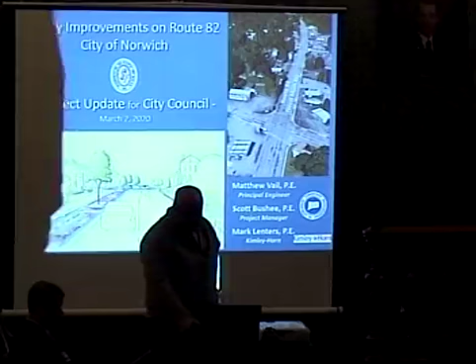Last time we were here is about 2 years ago, so looking to give you guys an update on what's been happening in the last 2 years and status of the project and just a little more information. Getting things rolling. Why we're here. Just a short video, give you a quick indication of what we're looking at from DOT as far as operation and safety problems that bring our attention to this corridor. So this is the driveway in front of ShopRite. If you notice, there was a lot of time, there was no traffic moving.

Now you have someone here that wants to make a left turn into the driveway. Some of these cars behind them, they're trapped. They're through vehicles and they're stuck behind someone who wants to make a left turn. At this point, the capacity on the corridor is really failing. All these vehicles are trying to now change into another lane. That lends itself to sideswipe type crashes. There's one car wanting to make a left, has got traffic backed up as far as you can see. And the guy just ran the red light at the end of it.

How's this? Okay. With the roundabout corridor, you won't have those problems. Again, we've got a time when nobody's moving. Traffic's kind of stopped. You don't have dead time with roundabout corridors. Somebody's moving all the time. Again, we have a vehicle, got their left turn signal on. Through vehicles behind them, they're trapped, they can't go. Sometimes people tend to change lanes, sideswipe crashes can occur. Now traffic's backing up all the way past the crest of the hill as long as you can see, just because that one vehicle wanted to make a left turn. With roundabouts, all the turns are right turns. You don't have any left turning vehicles, you're not crossing lanes to get in and out of driveways.

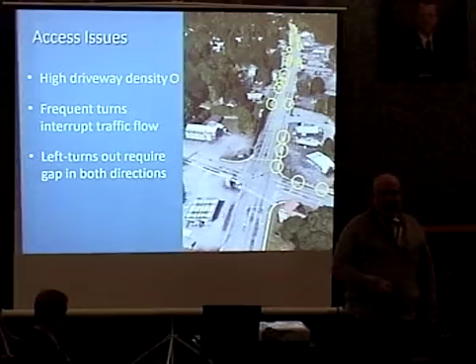You don't have that with a roundabout. All the turns will be right into the driveways with the raised median, and all the turns at the intersection are right turns with the roundabout.

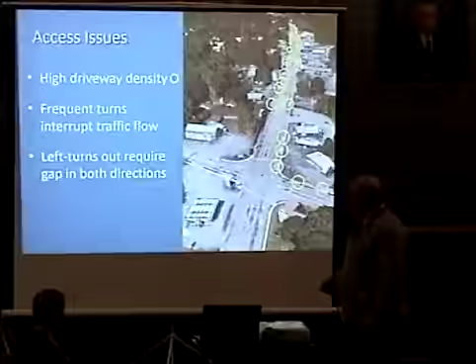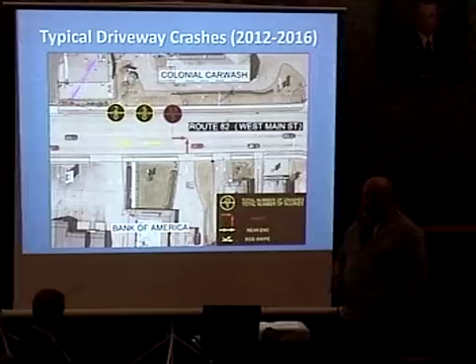This is a typical driveway along the corridor. This happens to be Bank of America, but it could be any driveway along the corridor, a commercial business. 5-year period, we've got 19 crashes with 5 injuries, all related to people making a left turn out of the driveway. And that's not even looking at driveways where you could make a turn in and out at the same driveway. This is just an exit-only driveway, so it's pretty significant.

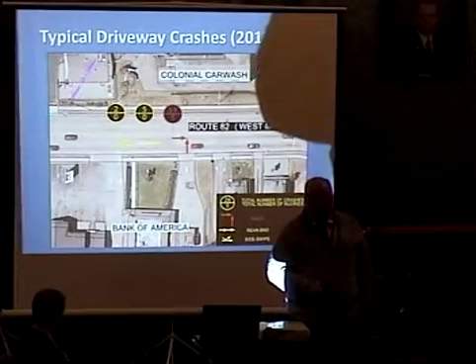Looking at one of the major intersections on the corridor, this is Route 82 at New London Turnpike, crash study. We've got 66 crashes in a 5-year period. That's pretty significant.

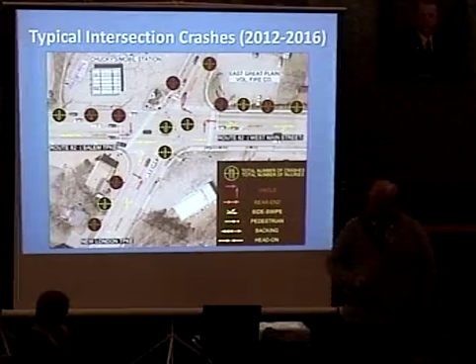Looking at the crash patterns that we have, we've got 17 rear-end crashes going eastbound, 11 rear-end crashes going westbound, 8 rear-end crashes going northbound, 9 rear-end crashes going southbound, and a number of angle crashes within the middle of the intersection. So with a roundabout, these types of crashes, they're not eliminated, but they're much, much less intense, much, much less in number.

One of the previous concepts to fix this corridor, address safety, was to add a 2-way left turn lane. Years ago, that was the only tool we had in our toolbox. New England wasn't really in the business of roundabouts. That came about later. But at that time, we had thought, well, maybe that's a viable solution. It was $34 million to put in the 2-way left turn lane. And that would get vehicles out of the through lane and into a safe haven if they want to turn into one of the driveways.

But with that, if you're at a driveway and you want to make a left turn, now you've got to cross 2 lanes of traffic going one way, across the 2-way left turn lane, and then have a gap of traffic in the other direction to execute your turn. So that's even more lanes you have to cross than what you currently have, which are already causing problems. So we know that's not a real good safety solution for the corridor.

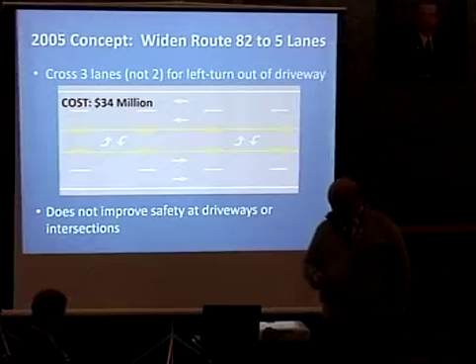What's really needed is access management. And in the planning toolbox, transportation safety toolbox, access management is kind of a word that we use when we're looking at things like raised medians, driveway consolidation, things like that. Route 82 really needs a raised median, and that will prevent left turns in and out of the driveways and make all the turns happen at the traffic signals.

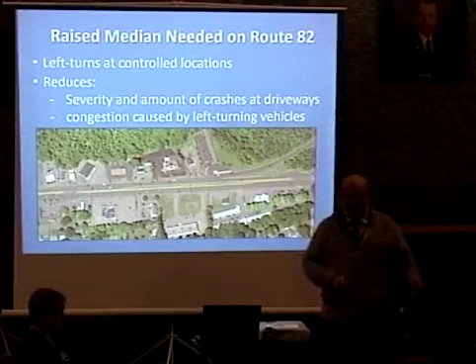Turns in and out of the driveway with a raised median will be right in, right out. You're only looking for a gap in traffic in one direction. You're not crossing a number of lanes to execute your turn. Much easier, much safer.

And this U-turn capability would only work for a passenger car. Your corridor is very commercialized. There's a lot of delivery vehicles, whether it's a box truck or a tractor trailer or something in that neighborhood, it wouldn't be able to make that U-turn. In order to make that U-turn for the larger vehicles, you'd have to do something like a jug handle, come around, like you see a lot of those in Massachusetts. And it's really not a viable option for that corridor. It's too much property impact, and it's really not going to address safety.

So what's really needed are roundabouts at the existing signalized intersections at the end of your raised medians, and the roundabouts will address the U-turns needed at the intersections to allow traffic to go past the driveway they're interested in, make a U-turn at the roundabout, and go back and execute a right turn into the driveway.

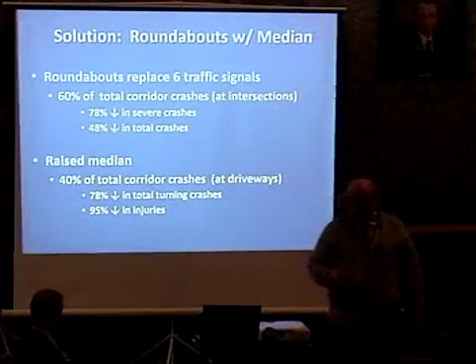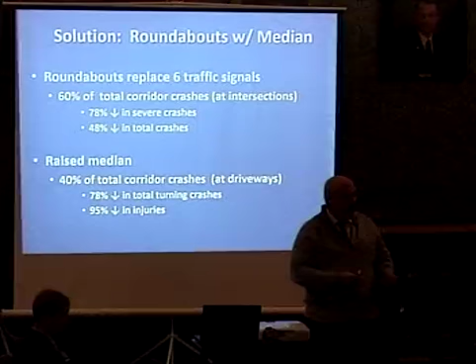With the raised median, 40% of the crashes were occurring at commercial driveways and unsignalized intersections. Studies have shown where corridors have had a raised median installed, it's reduced turning crashes by 78% and reduced injuries by 95%. The injury reduction makes sense - that's where you don't have a vehicle crossing 2 or 3 lanes to get into their desired lane of traffic, causing side-swipe type crashes with a high speed differential. That's when people tend to get hurt.

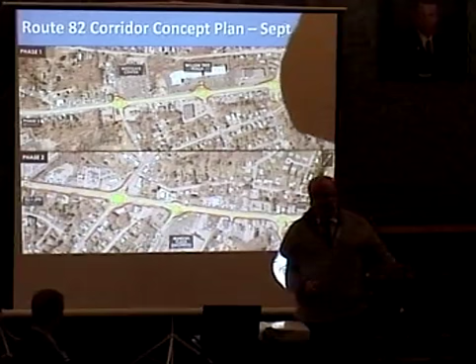This was a concept plan shown 4 to 5 years ago with the city. The one we're currently working on is still similar. Our status - we're probably about 20% into the design process. We've got a long ways to go.

We prepared this map. This is not the current plan - this is what was shown 5 years ago.

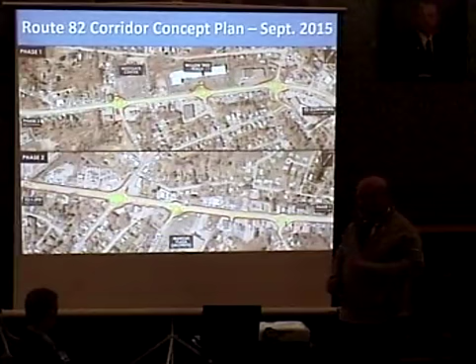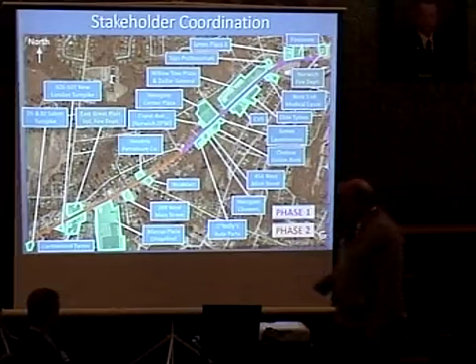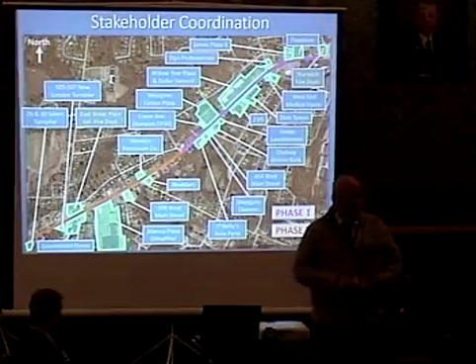I prepared this map to give you an idea of everyone we've been speaking with over the past 2 years or so. We're only 20% into the design process, and a lot of that's because we've been doing listening sessions. DOT's been going out, meeting with property owners and business owners, talking about parking lots, driveways, traffic circulation around businesses, and how best we can design the corridor to meet the needs of that particular business. We haven't gotten to everybody yet, but we've made a significant effort so far, and we still have a lot of work to go through to get to everyone else. But we're planning on it. Everyone shown on this plan, we've had meetings with on site at their property, including the 2 fire departments and the ambulance service, who are very supportive of the roundabout project.

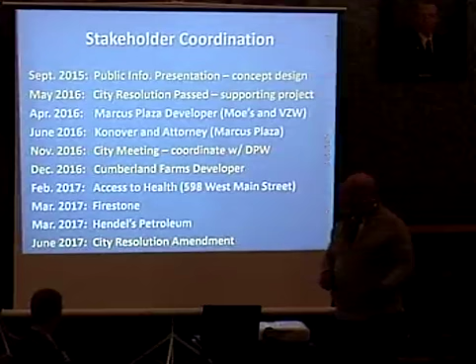Here's a list of everyone we've been meeting with - we call these listening sessions. DOT's gone in and said, we have this corridor plan, it involves roundabouts, here's how it affects your particular property. What are your concerns? How do you use this parking over here? How does your traffic circulate around? How do your deliveries come in and access your property? We need to know these things to design the project. It's a lot of work and a lot of time.

Our current concept plan for the corridor project removes 7 traffic signals and replaces them with 6 roundabouts. It's split into 2 phases, 3 roundabouts in each phase. Phase 1 starts down at Asylum, Route 82, and extends west, then phase 2 picks up, extending further west. Phase 1, we're looking at construction in 2024.

As I mentioned, we've got a long ways to go - a lot of businesses to speak with, a lot of property owners, a lot of utility coordination, and still a lot more design effort. We're trying to put some time in and do this right, not looking to slap plans together and just throw it out to bid.

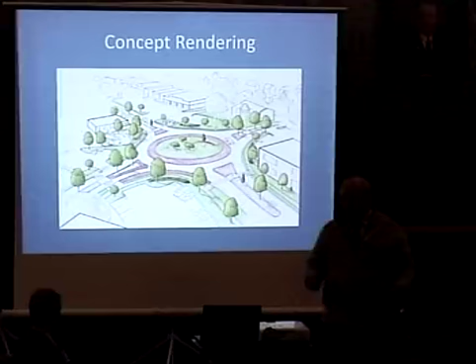This shows a concept rendering of what your community could look like with one of the roundabouts. This is just an idea - it wasn't coordinated with the city, you can't put any of this on the city, the city certainly didn't agree to this. I just threw this in the presentation to show the change from a 4-lane roadway to a roundabout. You could have some plantings and aesthetic character to it.

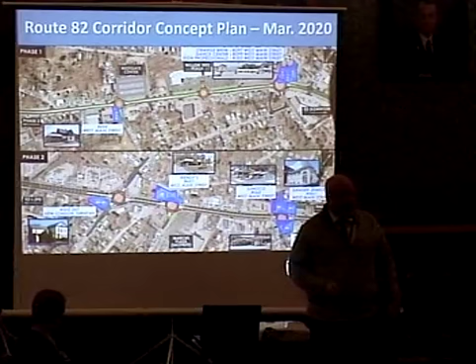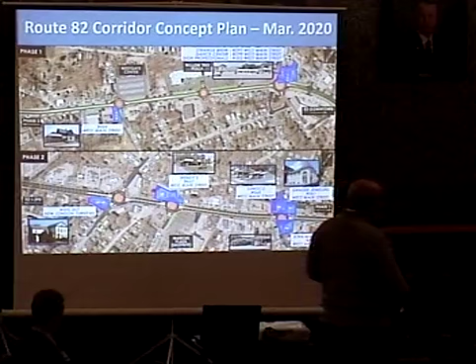The council had interest in significant property impacts along the corridor. As I mentioned, we're still only in the 20% stage. I'm not going to say this is a final design by any means. We've got a long ways to go. We're still working on geometry. But at the moment, at a preliminary look, these are the significant property impacts. That's something we could discuss further at a roundtable if you're interested.

At this time, I'm going to pass the presentation over to Mark Lenters. But since the last council meeting, we've met with emergency services, both fire departments and ambulance service, pretty supportive of the project. We've been looking at how to address construction impacts and how to phase the project. I don't have the details of that yet. We've got a lot longer to go in the design process, but we're looking at what might be considered for night work. Of the sections where we're doing 3 roundabouts at a time, we're not going to tear up everything and have 3 roundabouts under construction where traffic is significantly impacted for that entire stretch. We'll try to work on isolated locations and then keep moving on to minimize impacts to traffic. We've been through the slides I showed you with the business coordination, meeting with a lot of businesses. If I didn't get to you yet, please have patience. We will get to you.

And we've been also looking at other successful roundabout corridors. Now, Mark Lenters will talk a little bit about DOT's involvement.

The last time we were out here at a council meeting, I had a lot of questions about what experience DOT has in design with roundabout corridors, and I told you we didn't have any. We've designed a number of single roundabouts at isolated locations, but not in a corridor. And of the 7 locations that we've designed, they've all been a huge success as far as improving safety significantly and improving capacity substantially.

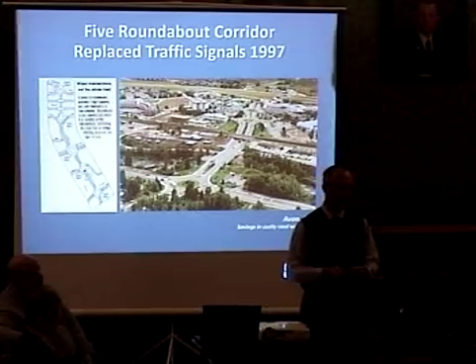So with that, we'll go into a few corridors. This was the first roundabout corridor in North America. It happened to be in the Vail Valley, a very high touristed area, so you'd think unfamiliar drivers. Vail had its success with two interchange roundabout projects. Avon, a community about 8 miles from Vail, observed that success. Now Vail has since redeveloped a couple of times and spent over $1 billion in new development because the roundabouts provided interchange capacity. Avon saw that in 1995, '96, and said, we want that.

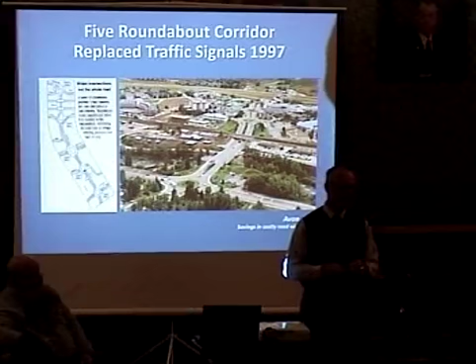So they actually passed a referendum, tax incremental financing, and funded the roundabouts to have them constructed almost immediately. It was a fast-track project. Since then, Avon's invested about $500 million in development expansion, and we have some of the tax data to show that.

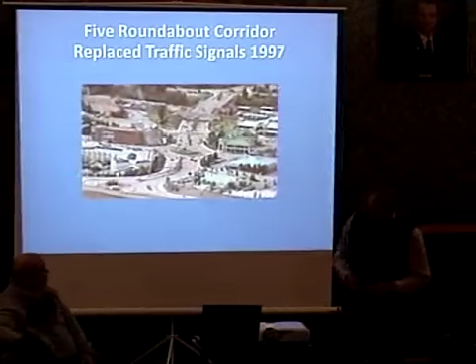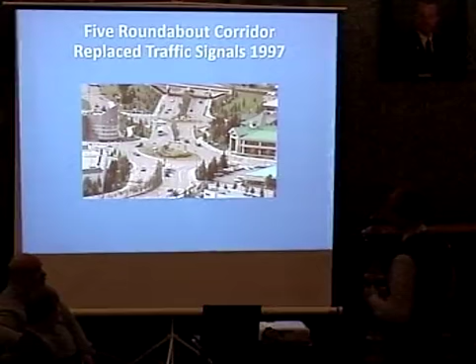So, but first a little video clip if we can get this going here. You'll see traffic flowing in a roundabout corridor is all generally flowing at about the same speed, so the predictability of corridors with roundabouts is quite good. When traffic flows about the same speed, if you're in a driveway, you can predict how easy it is to get out, because you don't have someone going fast, someone going slow, someone partially stopped, someone queuing, buses getting through, pedestrians crossing in behind.

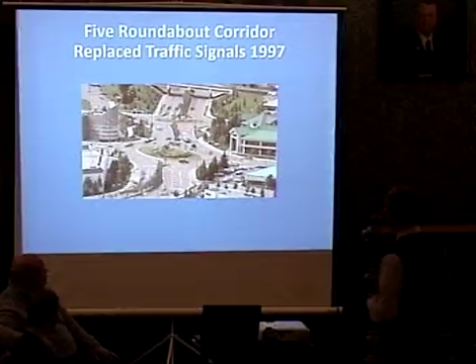Pedestrians crossing in behind here. In a moment you'll see some pedestrians crossing in here. There goes someone across there. And there's our bus, without any stops, working through the corridor. Things generally look fairly calm. In a moment the video is going to speed up just to show you, there go the pedestrians, just to show you how much traffic it processes.

If this were traffic signals, which these intersections were, you would see a start-stop motion—things would go and then stop, and then go and then stop. You wouldn't see this continuous flow of traffic. Somewhat tiring if you watched it for any length of time. But the impression you get is that there's less delay, the air quality is probably better, the fuel consumption is lower, and the safety is better because speeds are predictable, and speeds at conflict points between drivers, at entry and exit points, are low, in the range of 20 to 25 miles per hour. So that's been a good news story.

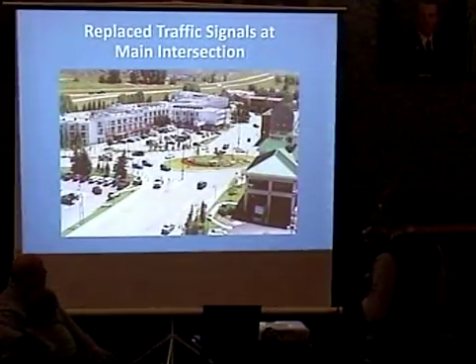And so the placemaking afforded by the use of roundabouts in this area—these are bronze statues of horses with plantings, and this is a hotel. There are restaurants and banks around the intersection, a large restaurant and office complex there, all of which needed access, all of which had pedestrian interests. The business owners didn't change; they simply invested more in what they already had to make it thrive. And that's the pattern we've seen around the country.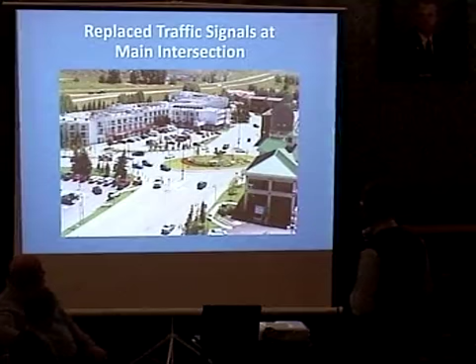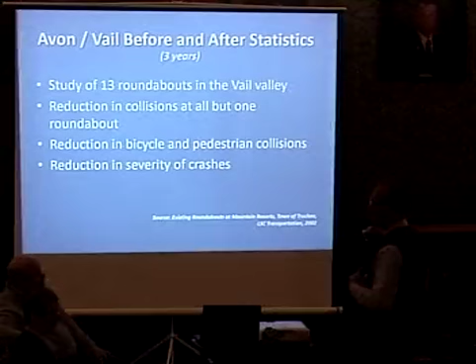In some before and after studies, we want to be evidence-based. 13 roundabouts eventually developed in the Vail Valley, 5 in Avon, several more on the outskirts, and then the ones in Vail. They all had collision reductions except one roundabout, which had about the same property damage crashes. They had reduced bicycle and pedestrian crashes, and of course the reduction in the severity of crashes was impressive.

So the town of Avon several years ago had this downtown master plan with these larger development areas and large blocks. They were investing, because the roundabout corridor was essentially the spine of the community, providing access from I-70 in and out of Denver and Vail to the east of Avon, and Beaver Creek, where former President Ford had a property.

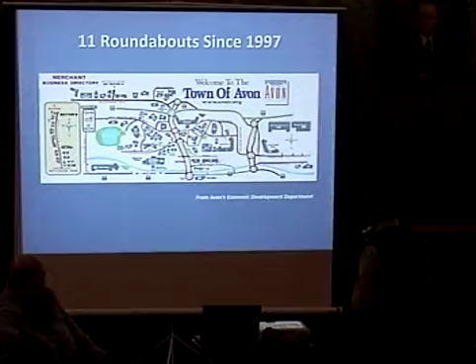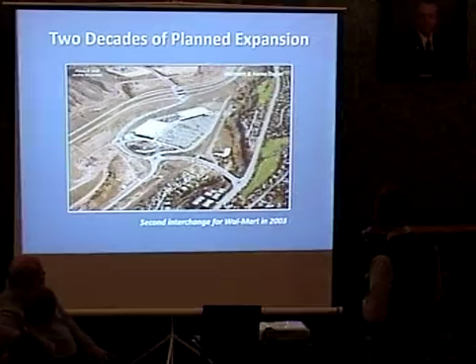So there's some expensive real estate there, and they've since achieved a very high-end look for the corridor and the areas around. So this is a power center, a little different use of roundabouts and corridors, but since this photo's been taken, it's all filled in. You could look in Google Maps and you'd see other buildings, Lowe's and Walmart, and then again, this is US 6, that used to go all the way to Denver, and I-70 replaced it. So very high-end yield on retail of a power center.

So some of the revenue in the early years when we were collecting this information showed, just before the recession, a steady increase from the time the roundabouts were built in '97, things continuing to increase, a slight fall off in the financial crisis period of time. But I went back and collected some more data recently, and we saw a 20% increase in sales tax revenue, which means businesses are doing well in the area.

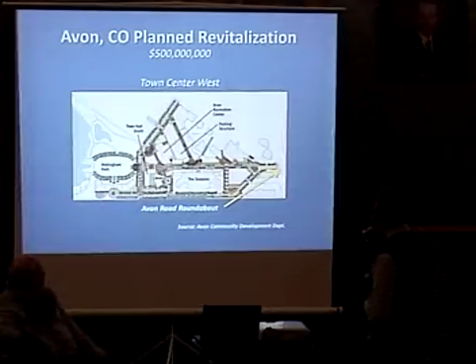So some of the additional development, the roundabout is anchored here on a spine, and then just to the west of that, there's a small lake. They're looking at a whole main central area. These are all recreation centers, some municipal buildings, but some hotels as well.

So let me back that one up. In Carmel, Indiana, for a while it was being called Roundabout Mecca. Over about a 7 or 10 year period, Carmel built about 75, 80 roundabouts. A lot of them were at major crossroads, and a lot of them helped with development corridors.

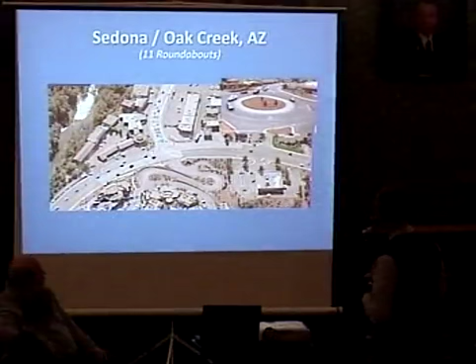This is one that, again, pushing a little bit to the west. If you know Sedona and Oak Creek in Arizona, northern Arizona, south of Flagstaff, it's a kind of an artsy community, very different feel. But again, roundabouts anchored a lot of the development that was suffering from problems with congestion in the vicinity of access points where driveways couldn't get on and off of SR 89A and SR 179, two state roads. There's a large Hyatt hotel, US Post Office, a Burger King, and some other businesses, and some small retail, a lot of it family-owned type business.

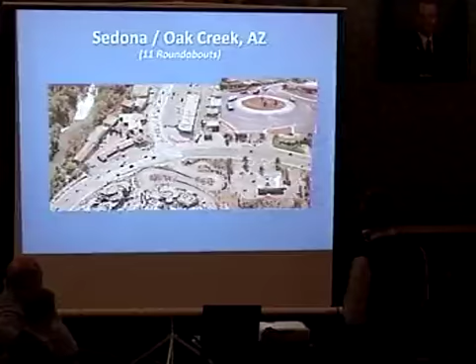And if I get my little video going here, have to.

So you see that roughly the same amount of traffic in the little video inset here is replacing what's there today. The speeds past this development were in the range of 45 miles per hour, so gaining access anywhere near the traffic signal was a problem. The gas station, they were all hampered by access and queues. And you can see in the after condition, the fluid flow of traffic at low speeds with comfortable pedestrian crossings.

And a lot of this is tourist traffic, all throughout the year. Sedona is a very attractive community to visit. There's a lot of cultural and natural resources.

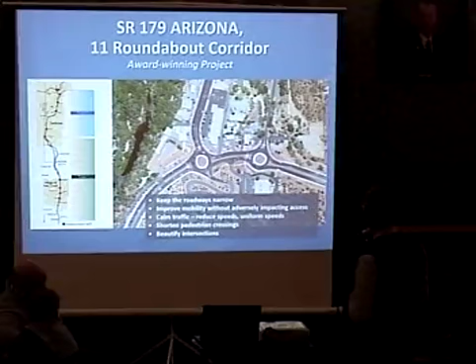And so the replacement of those two main intersections has fostered intensification of some of the development and just improvement of some of the facades, the buildings. They've invested more in these businesses along the corridor. And you can see compared to the previous photo, there's almost no congestion.

These days, we're hearing that they think they might need to add a right turn, so there's some issues with congestion now. These were built in 2008, 2009, and 10 or 11 years since, they're starting to see some congestion. But they purposely went for the single lane roundabout options with all 11 roundabouts from top to bottom through the two communities. They didn't want a thoroughfare. They wanted this to be a low-speed corridor that fostered making it a destination more than a throughput.

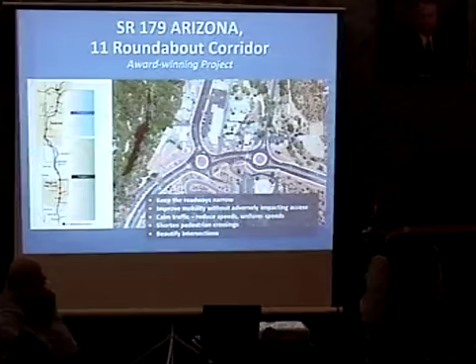This one is something that's just beginning down in Florida. We were crisscrossing the country. There was a gentleman named Rod Warner who didn't belong to the Chamber of Commerce or sit on council, and he set out to oppose Florida DOT's practice of buying a lot of right-of-way and building extremely wide roadways. On a section of US 41, Tamiami Trail, which goes all the way to Green Bay, the section south of Sarasota goes down to Venice. In fact, they did widen it.

So those of us watching this corridor into Venice observed that Rod lost the battle but won the war, because Billy Hattaway, the Secretary of Transportation in that region, turned it around and said they're not going to widen US 41. Instead, they're adding bike lanes, putting sections on a diet, and building essentially a string of pearls. Several are already under construction, anchoring large cultural opportunities like the Opera House and access to the causeway. It's a very attractive area, and they want to move traffic more fluidly while having pedestrian access, since this whole waterfront is one big network of trails and access.

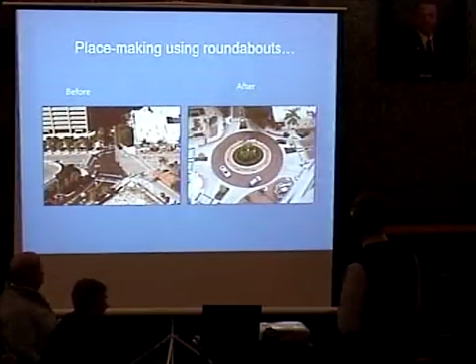Let's see if we can go ahead one more. So there's the before and after. With traffic signal controls, it's almost a sterile environment, very difficult for pedestrians, and very inefficient in terms of controlling traffic at 5 legs.

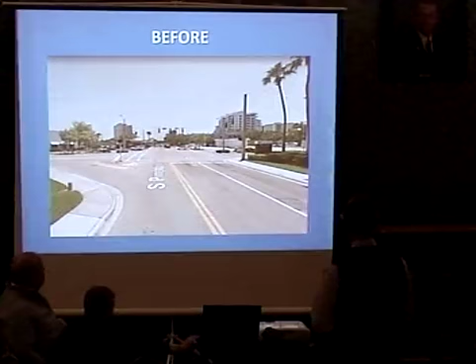Another comparison: you can see the sea of pavement, the longer pedestrian crosswalks, and the difficulty of having access points stranded with pedestrians, strollers, kids, and bikes. Then the after condition shows short pedestrian crosswalks, more placemaking, more vegetation, a more attractive area, and a very serviceable design for drainage and aesthetics.

On to the northeast now, another section of Highway 41 that goes all the way to Green Bay, Wisconsin. I lived there for 10 years before moving to Atlanta two years ago and worked on this corridor project. Businesses were suffering, just post-recession, 2009 and 2010. The city really wanted to give this area an injection of investment in transportation.

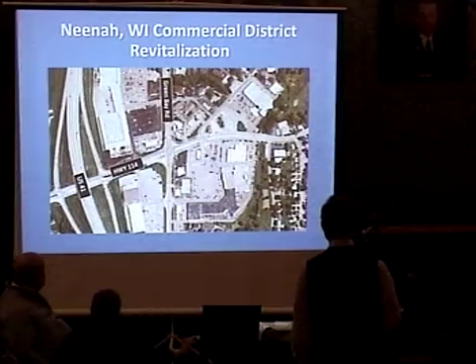All of these accesses were hampered by congestion at this main intersection—an anchor food store, ancillary commercial, fast food, gas stations, another anchor, shopping centers—and all of this was falling into disrepair.

With the introduction of four roundabouts in the area, access was improved. The U-turn opportunity I started out talking about was really a bonus for some of these developments, since they were in the area of influence of the intersection. Access had been difficult, and providing U-turns and slow-speed traffic past their front door made it much more attractive for commercial use. At the bottom it says $13 million in commercial retail renewal.

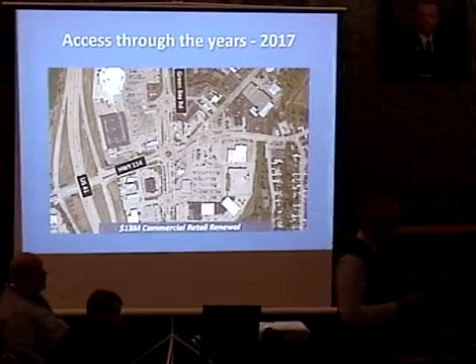That was all invested by these landowners and business owners, who injected that kind of funding into their businesses and gave the area a facelift after the roundabouts were built. This is a common thing we see—we often hear from gas station franchises that they're looking for the next roundabout intersection so they can locate right next to it. They get lower-speed traffic, the traffic goes around, and they can see the development from the center of the intersection instead of focusing on signal heads.

Again, the before and after: large, long pedestrian crosswalks and high-speed traffic through an intersection, versus more placemaking, low-speed traffic, space for trucks, and better access to retail. Thank you—oh, there we go, there's a piece of video.

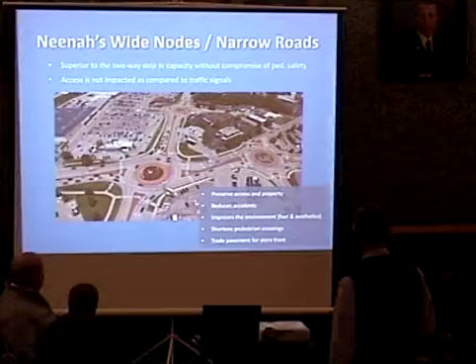There's a bit of queuing coming from the shopping center, but that's a good sign—these were empty lots before. Now, because traffic moves quite smoothly and fluidly, all this traffic clears and goes through these other intersections with the main driveways. That traffic can now make U-turns to go back the other way, creating great opportunities for some of that business.

Okay. And then that one more.

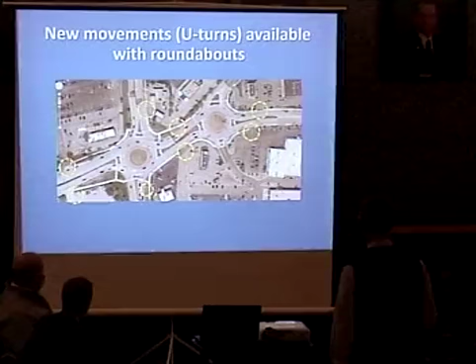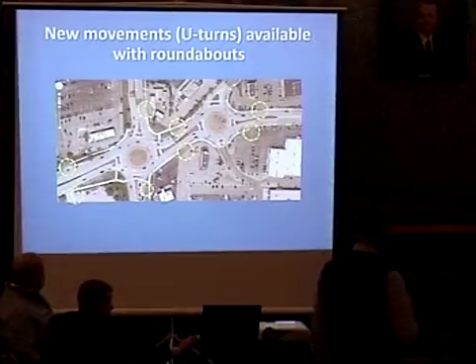So these were some of the existing access points that were improved with the use of U-turns. A driver wanting to make a left turn into this development can't because there's no break in the median. They make the U-turn at the roundabout, and now they can access this development. Similarly between these two, a pair, they can come out and make U-turns from either direction. Now we start to see intensification, and these businesses are starting to get the exposure they didn't previously have because of the U-turns and the median access.

So for the before and after studies, Kansas State University did a survey of businesses, and the conclusions were based on the widely accepted assumption that if business areas have good vehicle access and safe access, traffic should flow and businesses should prosper and grow. Conversely, businesses that don't have good access and good traffic flow will not thrive, and that stands to reason. So we're back to where we were with Scott's presentation, two phases of a project.

You see the medians dividing the roadway with U-turn opportunities at the roundabouts, creating a uniform flow of traffic and a slower movement of traffic in terms of speed. So it's safer if there's going to be conflicts with bicycles, pedestrians, and vehicles, because they're reconciled through the use of roundabouts that help slow traffic down.

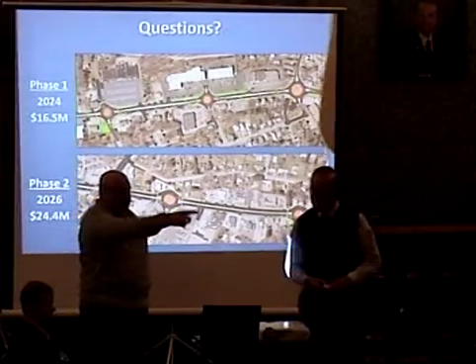I think we're pretty much at the point of questions. Questions from the council? Sure, go ahead, I have a few.

I think you kind of buzzed through one of the slides there pretty quickly, and I had particular concern as to the impact on some of the businesses in that area from the actual building, like the land you would need to take that would impact those businesses, if you know the slide I'm referring to.

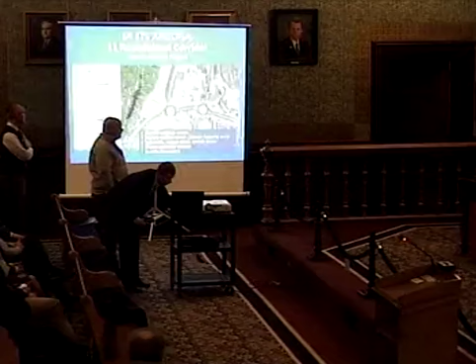What I was thinking is, I know you're only at the 20% stage, but obviously you realize that these particular businesses are going to be impacted. What kind of impact are they going to be looking at? I mean, are they going to have to relocate?

Yes, bottom line. The ones that I had shown on this plan—and we're not positive on all of these yet, we still have a long ways to go—but showing you where we're at, these would be businesses that would need to be relocated. We have a process through our right-of-way office to work with that business owner to help them find a new site to go.

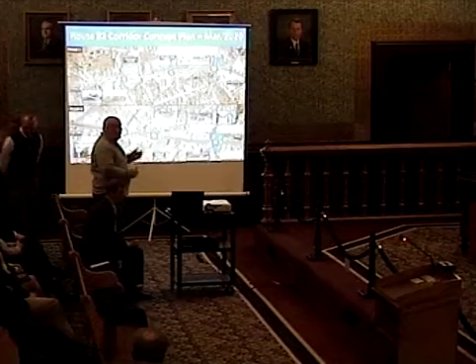We have financing to help them move. And then after the project is constructed, DOT doesn't want to own this property, so it's going to go up for sale. That will allow opportunities for new businesses to be developed.

The other thing—when you actually get to the construction phase, what kind of impacts are we looking at for some of the other businesses? I think that's a concern of a lot of them, that there's going to be a significant problem during this project, and it's obviously an extended project.

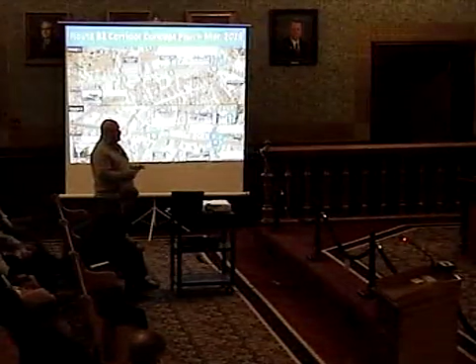Problem as far as work on their property, or problem as far as traffic being able to access? Traffic being able to access the property.

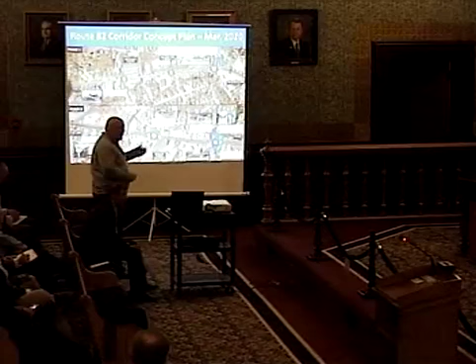So what I had suggested is we've got six roundabouts going in, broken up into two phases, two years apart. We're going to start on the eastern section first. We'll put out phasing plans to bid that'll show we're not going to rip up this whole thing and be interfering with this whole section of traffic at one time. We'll phase this so we try to work on an isolated location one day, then another day move on to another spot, so traffic through the whole corridor isn't seeing work activity after activity with multiple operations going on. We'll try to phase this as best we can to be sensitive to that.

The last time we were here, the council had suggested that we consider use of night work as much as possible. We have been considering that, and we will as much as possible. The thing we have to be careful with is a lot of residents in the area are pretty close, and the night work is loud, and there's only so much they can take or they're not going to be able to sleep. So night work that seems reasonable would be short duration tasks, things that aren't going to go on for weeks at a time.

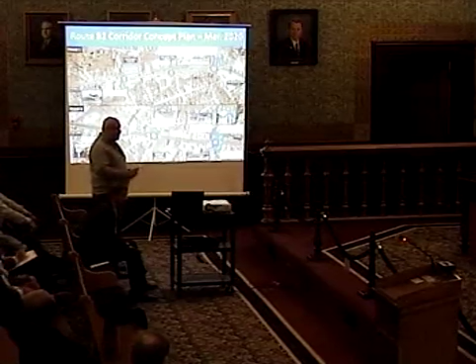Paving, absolutely, something we'd look to do at night. Maybe pouring concrete, that's a short operation, a few hours, maybe a one-night thing, then the next day we move on to something else. But once we have more detailed plans, those operations can be better identified. It's certainly true this entire corridor doesn't lend itself to night work—it would be too noisy.

One? Yeah, go ahead. Just one quick one, and I'm gonna go over to other council members. Diversion of traffic: are you looking at diverting traffic through the project or around it? There are parallel roads that run on both sides of this corridor. What have you looked at, and if so, how do you notify those neighborhoods if in fact that has to take place, even on a trial basis, depending on the extent of what that large work is?

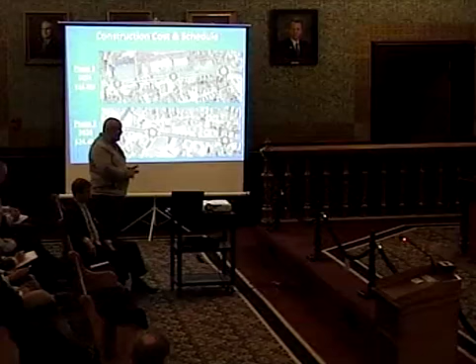At the moment, we're looking to maintain traffic through the corridor while we're working. Okay. So no official diversions of traffic. No signed detours, nothing like that. All right, thank you. Other members? Yes, Alderwoman Ella Miles, please.

I just have a question, because I actually live on one of those parallel streets off of 82. And a lot of folks use my street as a cut-through to get to New London Turnpike, because they don't want to deal with the traffic lights and all of that. So that tends to be an issue. You know, it's a low-speed street. People go flying down there like it's a freeway. And my only concern is, what's the long-term impact of people not wanting to deal with the reduced speeds, not wanting to deal with the roundabouts, and then continuing to use those side streets as the cut-through? Okay.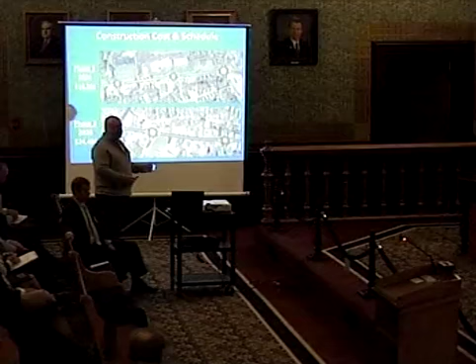We wouldn't be proposing the project if we didn't feel 100% confident this was going to be a much better solution than what's there now. Traffic is going to advance much quicker. When I showed the video at the beginning of the presentation, there was a lot of dead time. Traffic wasn't moving, you're just looking at pavement, cars are all stopped at the traffic signal. If you watch the videos that Mark presented, cars are moving in all different directions all the time. Somebody's moving, you don't have as much delay.

So what we anticipate is gonna happen, although speeds through the corridor are gonna be slower, the roundabouts are designed for the 20 to 25 mile an hour range to go through. You're not gonna have traffic signals to stop at and sit and wait and wait and wait. So the progression time through the corridor from west to east is gonna be faster than it is today. You're not gonna have all these lights to sit at, waiting for your turn to go. So your overall travel time will be less, and it's gonna be steady. So you're gonna get from one end to the other much quicker than you do now. You don't have the lights to stop at.

I don't think there would be any reason for someone to feel this is causing delay. It's probably gonna take them more time to exit the main roadway, make a turn up to your street, and then go down through the neighborhood as a cut-through, because this is gonna be a much more efficient and a much safer route when we're done.

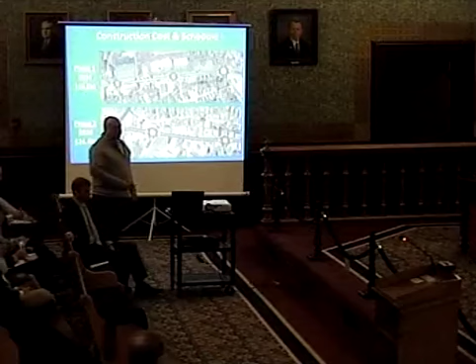Other members? Alderwoman Gould? Okay, so you have a perfect lead into my next question. You just said cars are moving constantly and in all different directions, right? Yes. So tell me how a person gets across the street. If the cars are constantly moving and they're going in every different direction, how do you get across the street? I'll explain it, and then we have a video we can show as well. I'm gonna use this one as an example.

So the roundabouts have crosswalks on all legs. We have a crosswalk here and a crosswalk here. The crosswalk is not located in front of the stop bar like it is now at the existing traffic signals, where you have a car there, they're stopped, the crosswalk's there, but the person in the car is looking to their left, they're looking to their right, they're watching the traffic signal, and they're at the same time trying to pay attention if someone stepped off the curb and wants to cross.

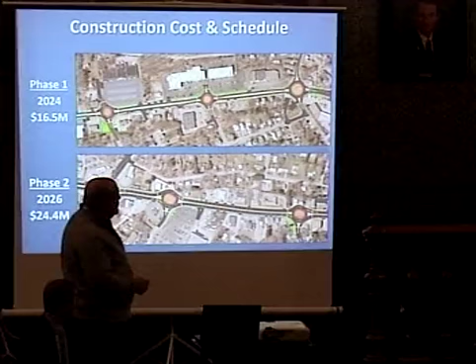These crosswalks with roundabouts are safer. They're positioned 25 feet back, so they're not where the car is trying to make a decision if they have a safe point to yield. It's the car behind them that they're going to cross. The crossing point for this section that's under a road diet, because it's currently 4 lanes of traffic that have to be crossed, this section of roadway is going to be reduced to 2 lanes.

And we're able to do that because the intersections are going to be much, much more efficient at moving traffic. Well, today, instead of crossing 4 lanes to get across, you're only going to have to cross 1 lane. So you watch for a gap at this direction. You stand on the curb, look to your left. You only have to look in one direction. Look to your left. When you get a gap, you go to the middle.

The middle, there's an island. You stand in the island. You look to your right, wait for a gap to the right, and you go across the other lane. Today, when someone crosses, they've got 4 lanes of traffic to cross. They're looking to their left, and they're looking to their right for a gap at the same time. So with a roundabout, the distance is much shorter, and you only have to look in one direction at a time to cross.

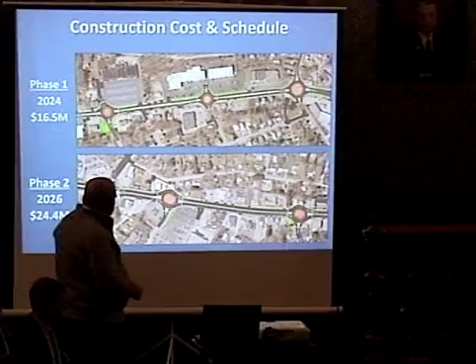To the western end of the project, where we still have 4 lanes, I noticed today when I was coming in, this section by New London Turnpike, this crossing actually has 6 lanes. There's 4 lanes in the eastbound direction across, and then 2 lanes going westbound. That's going to be reduced from 6 lanes down to 4 lanes. So the actual crossing width is going to be much, much less.

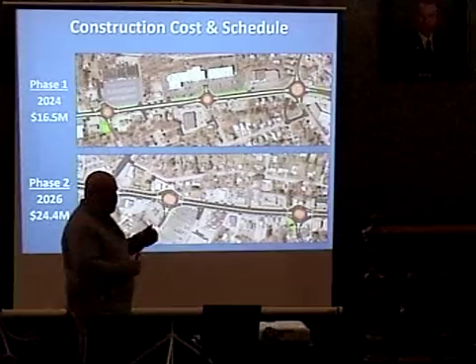So you stand on this curb, look to your left, wait for a gap in traffic, cross these 2 lanes, stand in the median, look to your right, wait for a gap in traffic, and cross these 2 lanes when it's safe to cross. But you're not looking left and right and trying to get a gap in 4 or 6 lanes of traffic at a time.

Right, but those intersections have HAWK lights. So you push the button, you wait for the light to tell you to go across, and you go across. And I understand, yes, there may be a distracted driver, but you still have that opportunity to get across the street. Now you're telling me I gotta look left and hope that when I'm pushing my shopping carriage or my baby carriage, that I'm fast enough to get across the street.

Right? Yeah, we have some slides and some video that may help further reinforce my response to that. Go ahead, Mark, why don't you? Yeah, sure. This is a great question because we have what we think is a safe situation. What we know about traffic signals, I push a button, I wait, I go. But what we fail to realize is that there's a hidden risk with signals that the pedestrian doesn't realize.

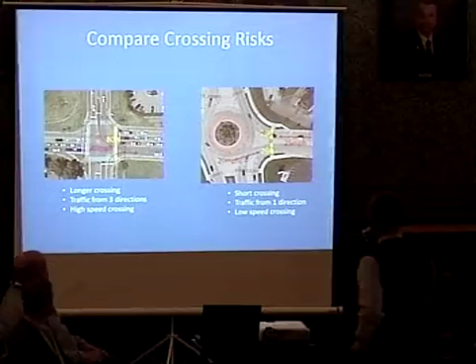And that's, if you look at this image, you've got the source of traffic from several different directions. I actually used this slide in Franklin, Tennessee a few weeks ago because they want to convert this signalized intersection to a roundabout with about that size. They're not true in scale. This roundabout's a little smaller than this, and this should be bigger by comparison. But the point of the slide is to show that in the area where pedestrians are at risk, the source of traffic is in 3 directions, not 1.

And the speed of traffic from those directions is as much as 40 miles per hour or as low as 20 or 25. We're all familiar with the right turn on red. So even when the pedestrian pushes the button and feels that they're safe in the crosswalk, the right turn on red is still a real risk. The problem is the pedestrian doesn't perceive it to be, because we all think that the walk symbol says I have the right of way to go, but you only have the right of way if someone gives it to you in the sense of a left turn, a right turn, and of course if someone fails the red, it's catastrophic.

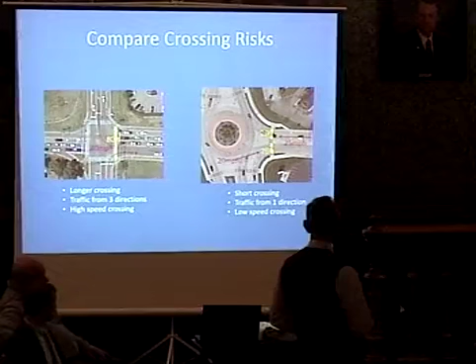In the case of the roundabout, your sense of safety matches your real safety. You don't really feel that safe in a roundabout crosswalk, so what you see is what you get. But what we know by comparison is that for every 10 traffic signals, there's approximately 1 pedestrian crash per year. For roundabouts, we have 4,000 or 5,000 in the United States now, and we can't count the number of pedestrian crashes. We don't have a statistic. It's less than 25 crashes with pedestrians in the last several years. There's been 1 fatal, but that's again with several thousand roundabouts in the United States.

So what we're seeing is the evidence telling us that pedestrians aren't at as great a risk at roundabouts, and we know that to be the case with signals, that they are at great risk.

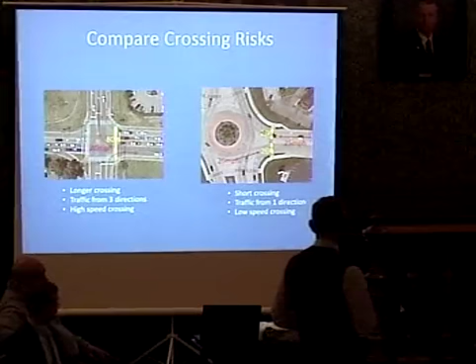If you pop back one—well, I'm not too proud of this, but what we've worked with communities to do is try to get them to help pedestrians understand how to be assertive in the crosswalk. They're not there to stop traffic, they're there to signal their way.

So I saw that driver coming, I put my hand up. You know where we got this? This isn't a roundabout-specific idea. We got this from Fort Lauderdale, Florida. On their website, for older pedestrians crossing at traffic signals, they advise putting their hand up to indicate to drivers making right turns that they're in the crosswalk and the walk symbol is up. They're that much at risk in communities like Fort Lauderdale. We said, well, that's not a hard thing to do—we can get pedestrians to point and walk.

So if you go to the next slide, okay, let's clip that one. This is always a big test: what's going to happen if I put a roundabout near a school? Again, about 10 years ago we stopped collecting data because the answer kept coming back solid from the parents, the administrators, the school bus drivers. This one happens to be a middle school, with lots of young kids.

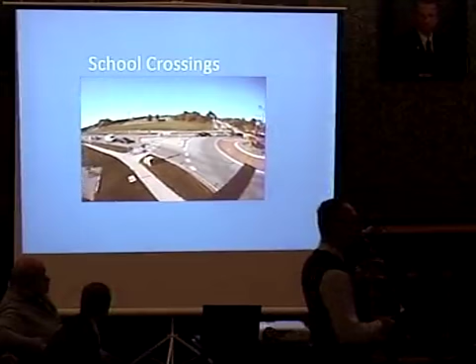But if you look closely, there's a child here—he's just dropped his books. Now, if that was a traffic signal, it's about to change, and the books would get run over unless the drivers were to stop. But because speeds are low and the child's given the right-of-way, this is the epitome, the optimal way to see pedestrians get the right-of-way and preference over other traffic. Sure, it's congested, but this child is not at risk by comparison to traffic signals.

So when we started collecting evidence like this 10, 15 years ago, it kept coming back positive, and schools really are attracted to the use of roundabouts at their main driveways. Even high schools with young novice drivers are finding it very attractive to use roundabouts. So we're seeing this kind of evidence with the pedestrian question, but it tends to be counterintuitive—we think we're at risk when, in fact, our perception of safety doesn't match the real safety afforded to the pedestrian.

Members have questions. Yes, Alderman DeLucia.

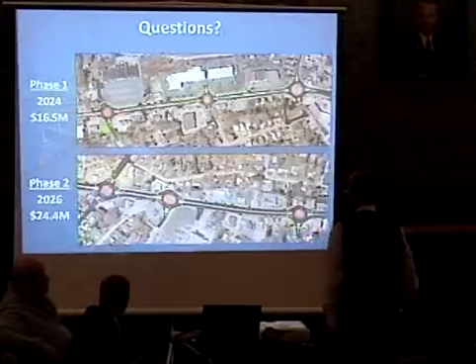So, my question goes beyond this project. From Asylum Street, have you considered what you might do from Asylum Street, the first roundabout on the east end, all the way down to where the fire station is, where High Street comes in, down there where the road splits?

We have not—that's for another day. Let's focus on this and see if we can get this done.

But that begs the question—if it's 2 lanes coming around the intersection at Asylum, you're opening back up to 4 lanes? Yep. So the existing condition there with all the traffic signals is going to remain in place. This isn't going to adversely affect that in any way. The operations at those existing signals will continue. That would be a project for another day—there's only so much we can handle under one project.

Well, so my personal preference would be that from that first roundabout on the east end of Asylum Street, the road be divided all the way down to the bottom of the hill, because that's one of the most—right there, that 4-lane stretch where Ann Street is, where Firestone is, where that shopping center, where Dairy Queen is. You've got the car service place there on the right-hand side—I believe it's called Computech, right? There are people making those left-hand turns on that downhill curve, and that's just as dangerous as the left-hand turns pretty much anywhere else on that stretch.

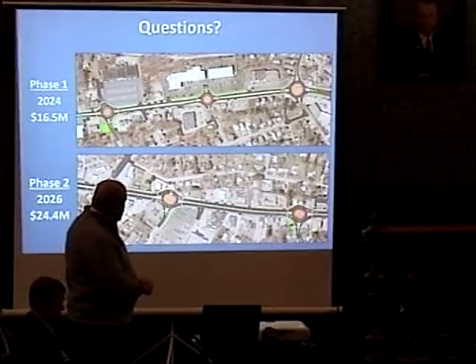If you want to turn into the plaza and you're coming westbound, which was the same place I showed the video—in the video I showed the car sitting here waiting to make a left. He's got two options. He doesn't sit here to make a left; he continues around the roundabout. He can either do a U-turn and make a right turn in, or he can go around the roundabout down Norman Road and turn into the plaza that way. But the car is never sitting here, and he's never backing up through traffic in this lane, basically blocking the lane.

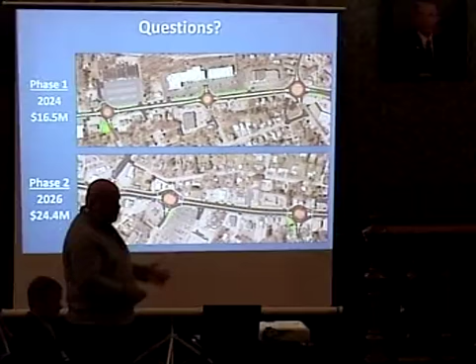Thank you. So taking that from the other direction, like Alderwoman Miles, I live right over there, and there are many times where you can barely get through the EGP four corners before you get stopped again at Norman Road, with 2 lanes of traffic in each direction backed up between those intersections. So yeah, I totally get it. It's people trying to make a left turn into Wendy's, or on and off Norman Road, the thing's a nightmare more often than not.

I had mentioned at the previous council meeting, and this is still something we're investigating, the highest pedestrian crossing location on the corridor, the area of most significant concern, is around ShopRite. There are 2 bus stops here with bus shelters, with heavy pedestrian crossing here and here. A lot of them are using public transportation, or else they're accessing the apartments down behind ShopRite.

We have another tool available to us, called the pedestrian hybrid beacon, which would be a mid-block crossing. That's not something we've decided on yet, but it's a consideration because of the heavy crossings here. If we were to do that, this crosswalk probably wouldn't be placed here—we'd probably be doing something closer to where the bus shelter is. But that's something we're not there yet on.